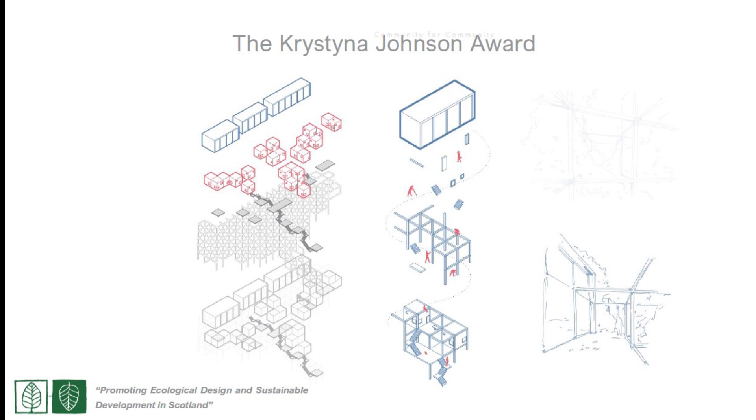Now going to move on to the Krystyna Johnson Award, and we should have Jim joining us via Zoom.

The Krystyna Johnson Award was set up in 2003 when my wife, Krystyna, died far too young, but we decided in SEDA that we would try and remember her with some kind of student scholarship, which originally was a travel award, but changed over the years.

Krystyna was an architect who worked mainly in refurbishment and restoration. She worked for Assist on the Glasgow tenement in the early days of the Glasgow tenement that we heard about yesterday from the MSP. She then became the first in-house architect for a housing association and continued to do a lot of refurbishment and rehabilitation work. This was basically putting bathrooms into Victorian tenements where residents had been sharing a toilet on the stairs.

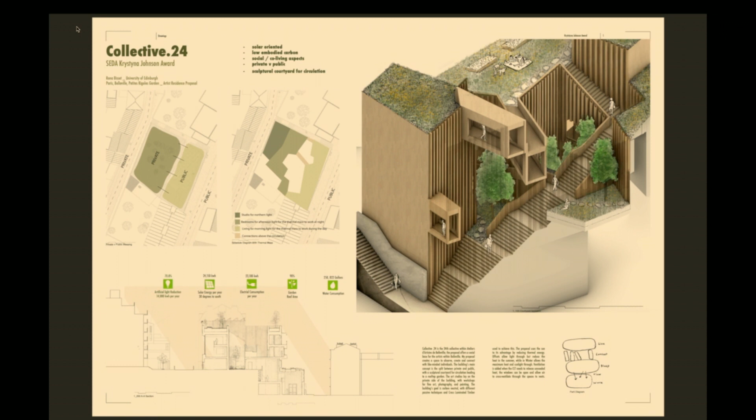The staircase separates the public from the private domains so that the artist residents can observe, create and connect with the artist community in the neighbourhood. Currently in Belleville, the artist community is declining as expensive developments pop up, leaving artists unhomed and creating art squats which create an unhealthy, uncomfortable environment. The community is struggling to survive, so this is being created so they have a better quality of life, and through the co-living apartments can socialise together and connect while having that artistry.

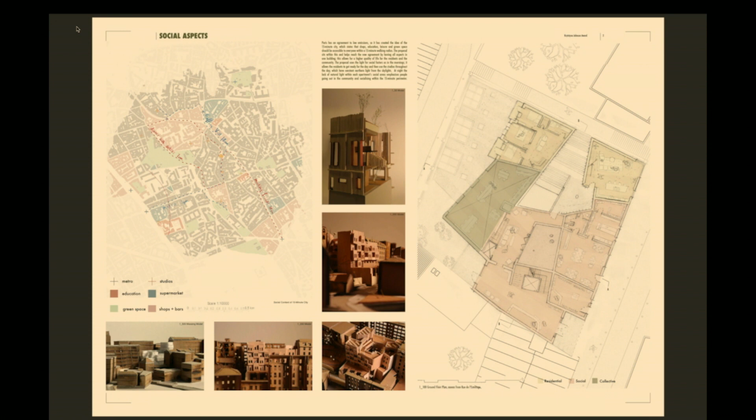My proposal is situated in a 15-minute city, so it encourages the residents to explore the community at night, especially because the natural light in the building is reduced through the building. So it encourages the residents to explore, creating social interactions and a better lifestyle for residents and neighbours, altogether reducing the CO2 emissions of Paris.

So how I did this was I used an in-depth light analysis that indicated the thermal mass of my main building material, CLT. This helps reduce the energy cost and the carbon cost by 70.8% compared to a normal concrete building. Alongside this, the natural light helped me indicate where my room schedule would be, so when divided up by private and public it helped me create my living to my bedroom spaces. When the thermal mass absorbs too much heat, I added offsets for the double height windows in the living area so that in summer it creates shade but also has cross ventilation from windows to the vents, and the vents enter through the staircase.

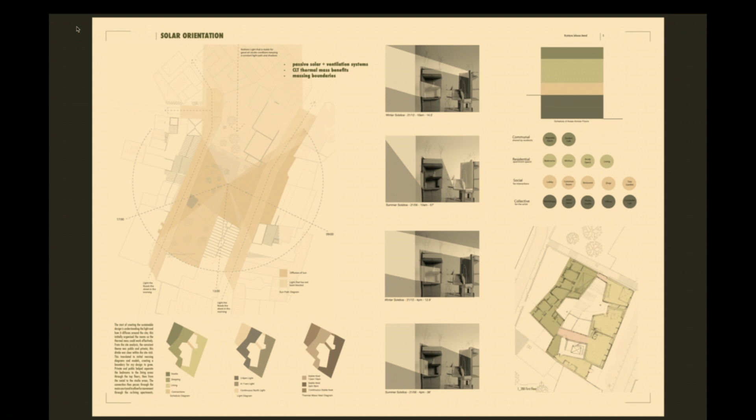I carried out a rough analysis to figure out the numbers for embodied carbon. My transportation factors emit 400 kilograms of CO2, and through the use of alnus cordata trees, this offsets the carbon by 240 kilograms of CO2 per tree, which I've used around my staircase and on the garden.

These trees are grown in a process called agroforestry. Agroforestry creates a microclimate for the farming and produces more yield and protects the crops.

The main material is cross-laminated timber, which emits 75% less carbon than concrete and also holds hygroscopic properties. It can be easily repaired and reused into biomass or new buildings, like the London V&A Courtyard Pavilion in 2018. However, if this building was situated in Scotland, it would not be feasible because there's a CLT plant in France which I have used, and in Scotland we do not have one yet.

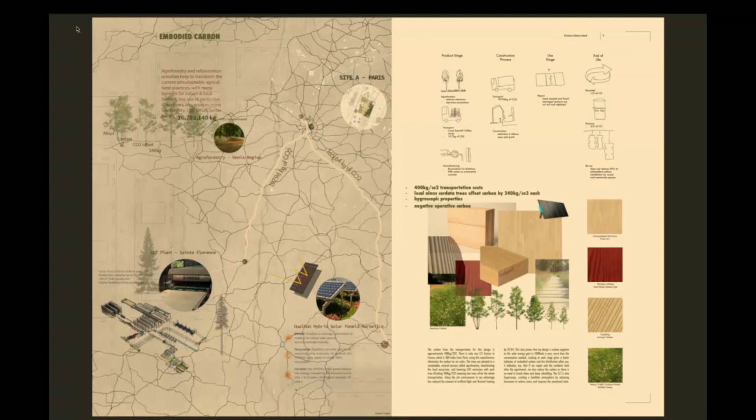So the carbon neutral design, with the air miles, costs 6,803.44 kilograms of CO2.

Each tree is located at my roof garden, and this is a 1.9 metre thick roof. There's a delayed drainage system so that the urban setting is not flooded in climate change, and it contains 7 layers of water permeability, which prevents water damage and controls moisture.

My intensive roof U-values are 0.07, with the max limit in Paris being 0.19. It also has hybrid 95% recyclable solar panels, which create 1,000 kilowatts a day, approximately the average monthly energy use of a house.

All in all, my design works well in context and enables a healthy community, creating an artist community too, helping with the responsibility to reduce the 30% of greenhouse gas emissions from the building sector.

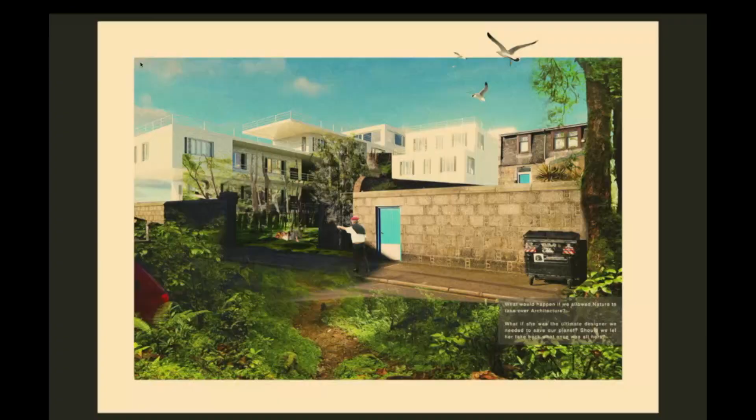The first thing I want to say is when I was a kid, I used to ride in the back seat of my father's or grandfather's car back in Venezuela, where I was born. I used to see all these construction sites, and I really hated them. I really thought architects were mean people, until I started studying architecture and realized it's a bit more than that.

So what would happen if we allowed nature to take back what we've taken from her? That's how I started with my project.

It's in the city center of Aberdeen, and it's a derelict space. As you can see, it's in a very busy area with a lot of shops and activity. It's also one of the worst streets in Aberdeen—very insecure, with quite a lot of homeless people on the streets.

So I started to tackle how I could change a little bit the environment for these people. You'll see in further slides how I can do this. I started with new materials that could be less expensive, lightweight, and have, for example, a scientific interest, which is very important today.

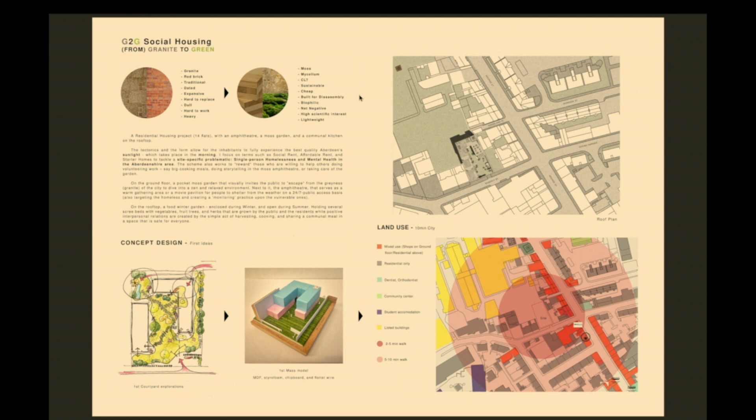The first thing I tackled is the morning light, which is very important in Aberdeen, since in Scotland we don't have much sunlight throughout the year. So I thought the morning light was quite a special thing to focus on, along with single-person homelessness and mental health in the Aberdeenshire area, which is a big issue I can see happening in this area.

First, I started with some data-driven design. I used Grasshopper and Ladybug to determine how my building would work.

I considered the volume of clouds throughout the year, which is 10 months out of 12 being cloudy days. From my background studying art, I was very inspired by the concept of komorebi—a Japanese concept of how light goes through the leaves, creating a mystic kind of environment that keeps you awake.

I also think architecture should focus more on site-specific problematics, which is something we're kind of missing. Certain cities have certain problems that should be addressed, and not all designs can be the same. In this case, I've tried to tackle single homelessness and hidden homelessness, which is obviously a political problem, but I'm looking at how we can address it through architecture.

I want you to do a quick exercise: imagine yourself in a room with 4 walls, a ceiling, and a floor. Imagine this room is gray—the ceiling is gray, the floor is gray. We are in Aberdeen, and it's raining and cold.

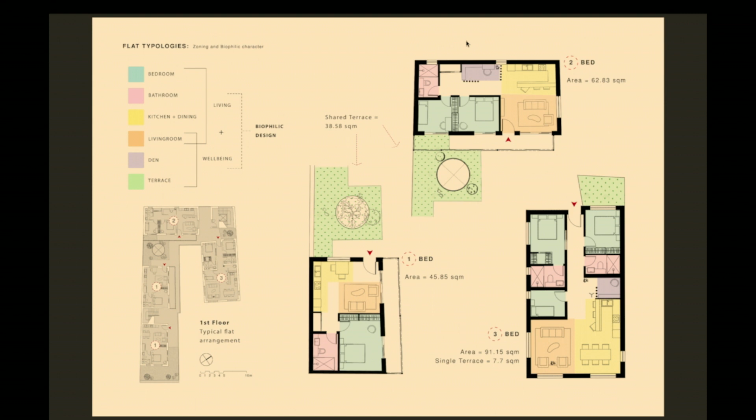So for my design, this is just a quick overview. I tried to design 3 types of flats—1 bed, 2 bed, and 3 bed—and thought strategically about how I can add certain spaces, like terrace areas and dens inside the flats, so people don't just live in the rooms all the time but get outside.

For the visual strategy, I've tried to use moss and this Japanese Zen garden strategy to drive people into the garden from outside to inside and vice versa. Do you think Scottish cities look like this at all? This would also help tackle urban heat island effects.

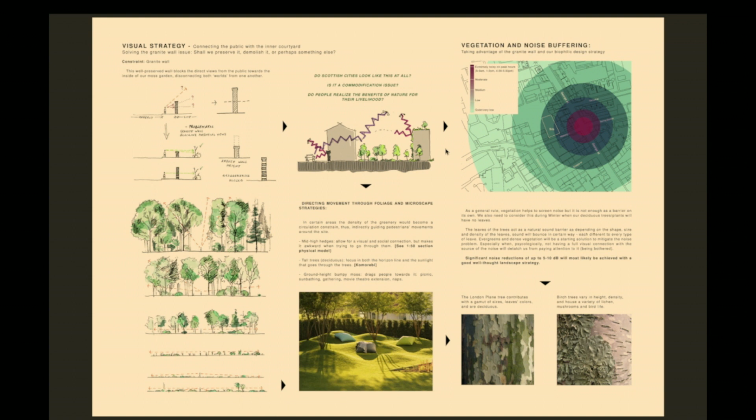I want to touch quickly on the wastewater heat recovery systems for my building. I don't use any bathtubs at all, which is for the sake of trying to save CO2—a massive, important thing in this project. It's over 2 tons of CO2 saved per year, only with the heat recovery systems.

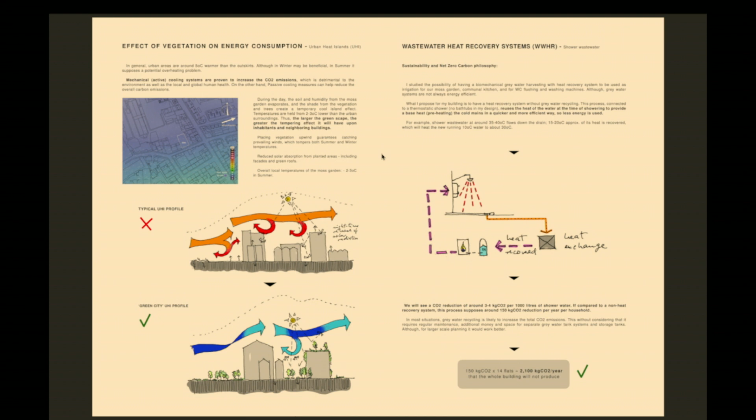As I mentioned before, urban heat islands are also diminishing or increasing the temperature depending on the season. In summer it will be less hot compared to other cities, for example Madrid or Barcelona. This would help a lot.

So this is my final slide, my poster slide—the one I presented for this competition. As you can see, it has 2 parts. The top one is a mycelium interior design I've created for indoor public spaces. It's a modular design made with Grasshopper, and it has many things.

It has the mycelium, the soil, and the springtails, which I have back there with my models. They are alive, and they keep this whole microsystem alive, so you don't need any maintenance—one of the other problems I was trying to tackle, since green roofs and green walls are very expensive to maintain.

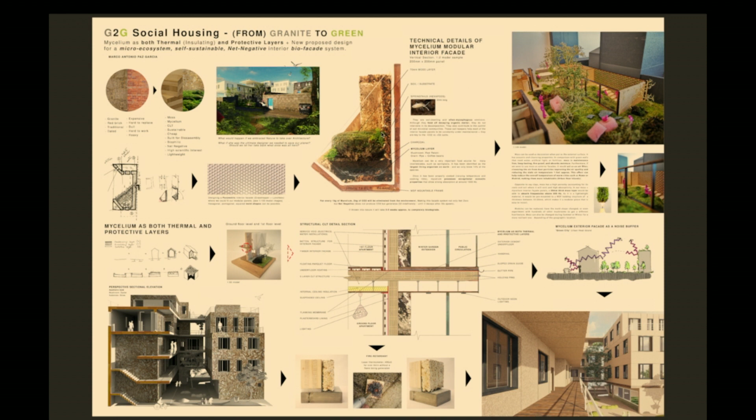And the bottom one, which is the mycelium, has both thermal and protective layers, built for a disassembly kind of approach. I'll be at the back if you'd like to ask more questions. That's my time, that's up.

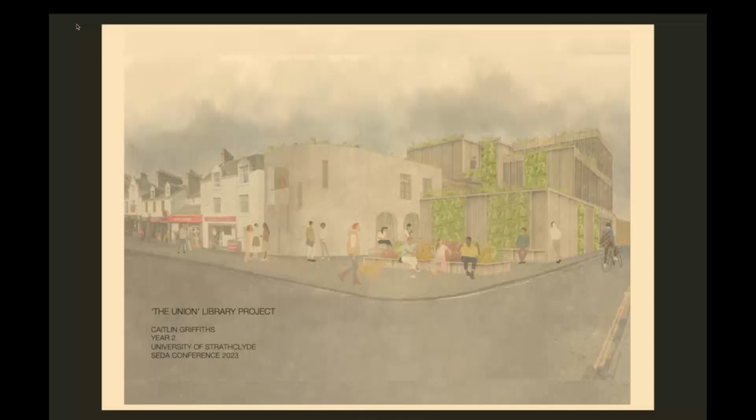It's all yours. So I'm Caitlin, from the University of Strathclyde, and the project I'm presenting today is my Year 2 project, the design of a student study library in the town of St Andrews. I'll quickly go over the design process and how the building responds to the site, as I think that's one of the most important things about the building.

St Andrews is known for its traditional sandstone buildings and old cobblestone streets, but there are many green spaces only really known by the people who live there, due to many being hidden away, closed, or even forgotten about. My project aims at looking at ways to appreciate these spaces more, highlighting the importance of views and vistas around St Andrews, and incorporating these into a library environment where I think they should be more important.

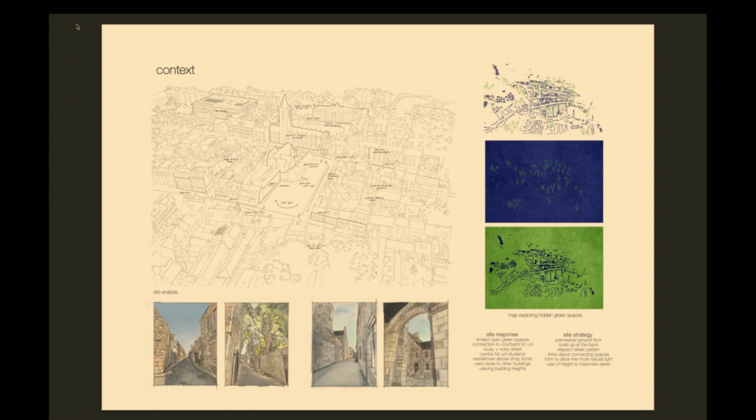The aim of the library was to respectfully create a modern study environment in quite a busy corner of the town, by connecting green spaces and encouraging the sharing of knowledge in this new community space. The concept was a direct response to the brief, but most importantly to the context, with priorities placed on the environment, circular economy, and user comfort.

The creation of outdoor seating, green terraces and courtyards made Union Street more of a destination and not just a route, creating interest for not only library users but passers-by as well, as it is such a populated area.

There was also an importance to make sure the building sat cohesively within its context. By stacking the spaces, which you can maybe see better in the next slide, the library doesn't sit too harshly on that site edge. The use of a modern construction material and curtain wall also creates quite a permeable facade and doesn't become too overbearing on the site.

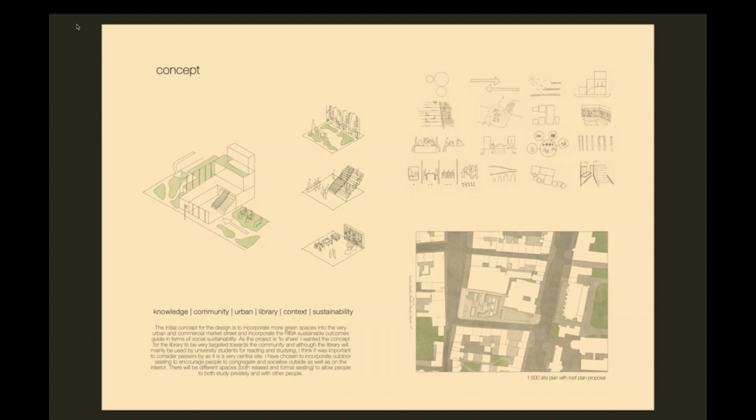So like I said, the Union Library was designed to encourage the sharing of knowledge, which I think is reflected a lot in the organisation of the plan.

The building is arranged in a very open plan style, with the public and private spaces being quite carefully thought out and deliberately placed. The idea was to have a large foyer space to accommodate people coming in from both main entrances, and a grand feature staircase that acted as an additional, more informal place for people to study, read, and chat, connecting the library users to the space a bit more.

I won't go over all the spaces, but the reading room and bookshelves have been placed on the first floor, just at the top of the stairs, to keep the books out of direct sunlight. Library users are guided here by the position of the stairs and the skylights above, and the layout of the bookcases helps lead your eye up and round onto the first floor.

There is a central void that connects all the spaces, as well as views out to the courtyard and over the town. Everything around the library is designed around that, as well as the natural light that enters the building. There's also space for a visiting academic placed at the front onto the street, replicating the way residences on Market Street are placed above the shop fronts.

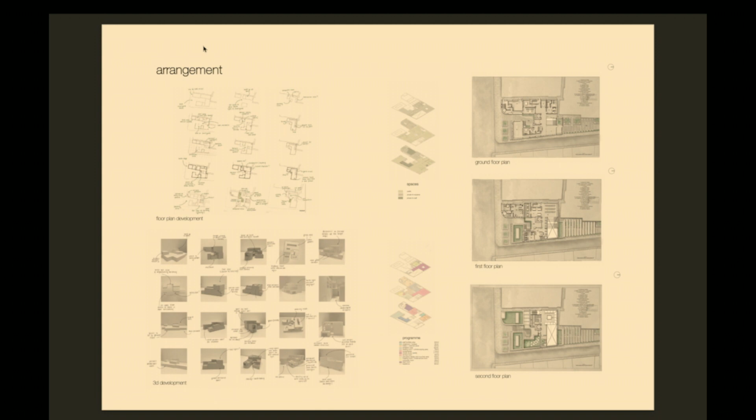So as you walk into the library, I wanted to create a really welcoming and calming environment, which I think is achieved not only by the use of natural light, but the use of quite a simple material palette, which is very different to the other buildings in St Andrews.

The library not only has spaces and places for personal study, but overall it creates a space for people to come together as a group and appreciate the wildflower planters in the courtyard spaces.

The goal was to allow as many spaces as possible to have direct access to a green terrace or to the courtyard, creating quite a seamless connection between indoors and outdoors, which I think is quite important in such an urban location, and to allow library users to recharge and take a step back from their studies.

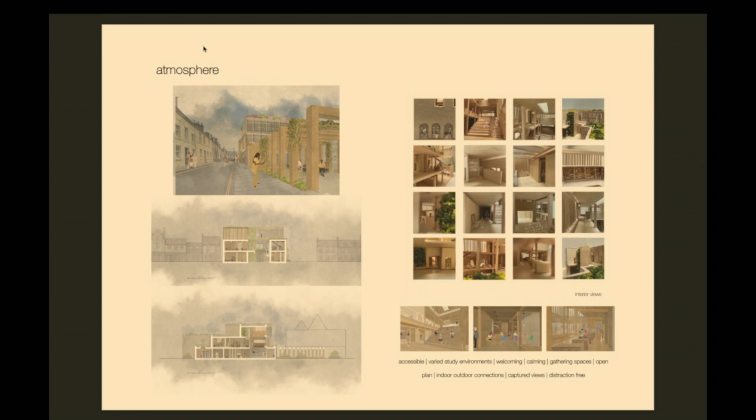So along with the creation of a new community space within the town, the materiality was obviously quite an important factor in the sustainability of the project, but both of these things went hand in hand with the atmosphere I wanted to create anyway, so it worked out quite well.

So I've got a CLT and glulam structure, which I thought about in terms of the circular economy, which worked quite well with that as well. It also tied into the atmosphere and created quite a peaceful entrance, which continued onto the inside. There's also the green roof that's increasing biodiversity but also reducing noise pollution.

There's a section of the building in sandstone that acts as a transition between the old buildings on Market Street and into this oasis corner of timber. The idea was that the use of timber only really reveals itself as you get closer to the building, which hints at the initial idea of those hidden green spaces, even though now those once hidden green spaces have been brought to the forefront of a modern urban library design.

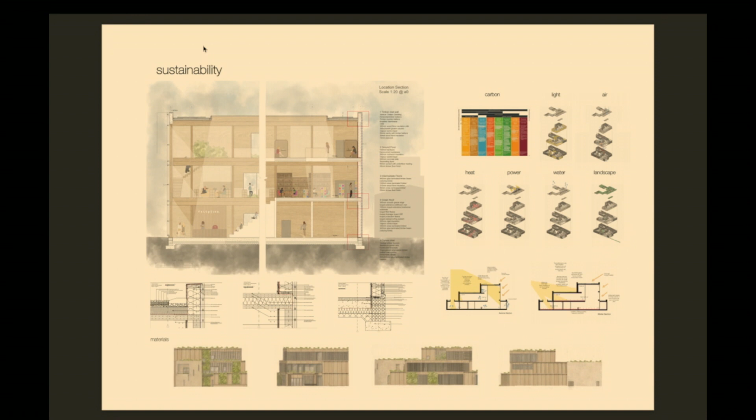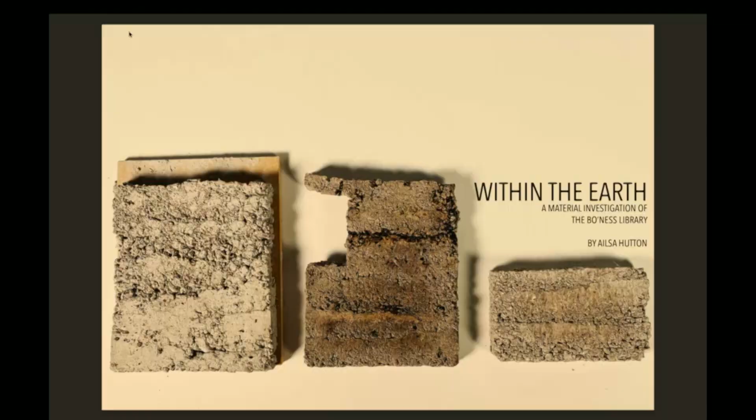Hello everyone, my name is Ailsa Hutton and I study at the Mackintosh School of Architecture. This is my project, Within the Earth, which is an adaptation design on the Bo'ness Library, focusing on a material investigation. So to begin with, I started with four principles.

First being earth, where I considered soil and its natural resources on the land. Then water, looking at water's interaction with our landscape and further understanding its properties. People, to understand how people interacted with Bo'ness's infrastructure. And finally, quality, how to improve the quality of life by improving the quality of a building.

So Bo'ness is not the most economic site, I would say. It's fallen short to quite a lot of economic decline in the past.

There are lots of disused buildings, which is where I started to think about reusing these brownfield sites for their building materials, such as timber, stone, etc.

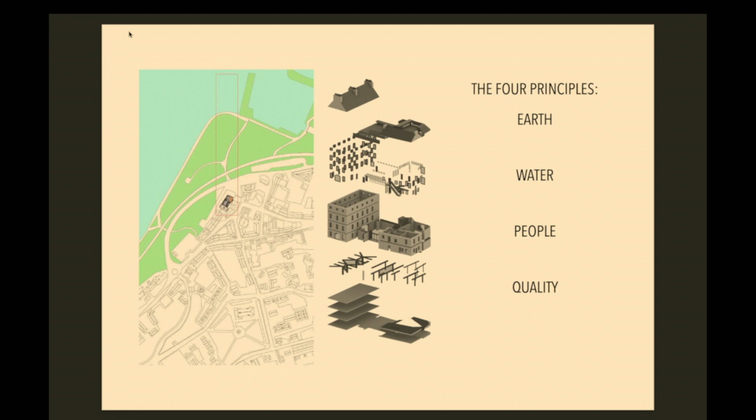However, when I looked closely, I actually saw how nature then reclaimed these sites, which made me consider how to use nature and architecture as complementary elements instead of contrasting ones.

So firstly, I wanted to investigate the geology of the land in Bo'ness, where I discovered that Bo'ness actually has a lot of marine clay deposits near the surface. And this interested me because it meant that there was more potential to use these building materials.

I then went on to research plants found locally in the area and found that eelgrass seaweed is found in the Firth of Forth, which is important for later.

To begin my material research, after learning that there was a lot of clay at the top of the surface, that really excited me, as it meant that rammed earth was an option.

Each sample of this rammed earth has a different ratio of soil to plaster, because I wanted to see how well it could hold together using as little binding agents as possible. And I also found that you can make cuts out of it for windows and doors.

The eelgrass that I found in the river is one of the most common species used for seaweed insulation. So I collected some that had washed up on the shore, more just to understand how to use the material.

Firstly, I made a model of the seaweed insulation panels to get an idea of scale and size. And then I went on to mix crushed seaweed with agar flakes, which created a bioplastic, and this was more just to understand how much potential this material has that we've not yet thought about.

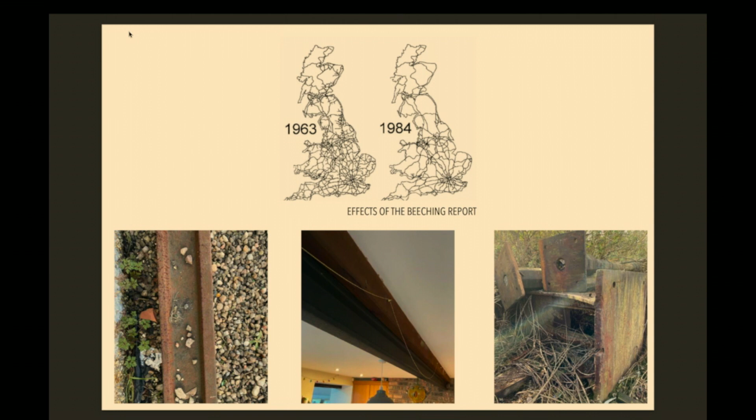So after the natural resources, I then went on to look at the industrial decline of Bo'ness, which seemed to be linked with the well-known Beeching report in the 60s. This disconnected lots of small towns within the UK.

Due to this, I actually did find a lot of scrap railway materials throughout Bo'ness, and railway tracks look a lot like I-beams, which are used to hold up buildings. So then I thought about recycling these scrap materials using urban mining for the structure in the building.

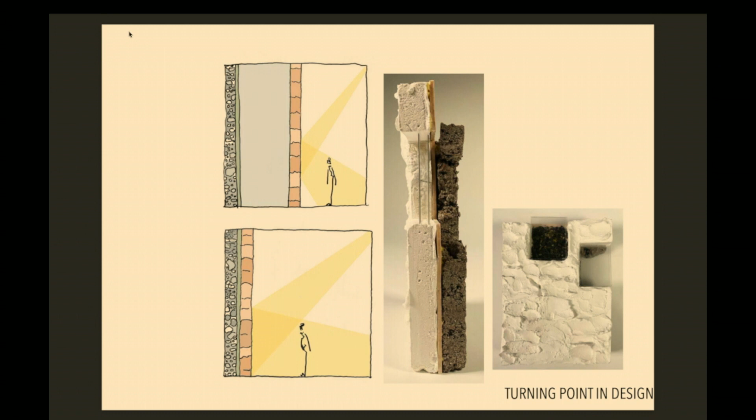So a turning point in my design was understanding how to use the focal point of the rammed earth more realistically. So initially it was going to be like an aesthetic feature within the building that helped with ventilation and air quality. However, this made the spaces less adaptable, and it also decreased the amount of natural light you could get there. So to resolve those issues, I really started to consider using rammed earth within the wall envelope.

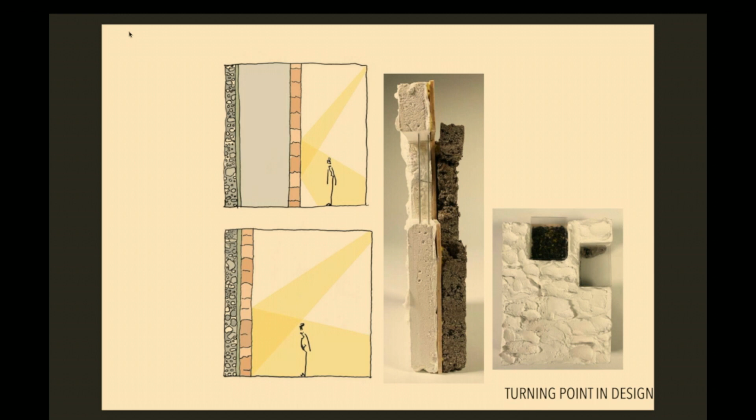This is quite a difficult concept to try and understand, especially with the Scottish climate. Rammed earth and water are not a great mixture.

So my design overall is a loose fit community space. It maintains the library function with a cafe area and a library area combined. It has a lecture hall space in the basement, an event space on the first floor, and a quiet work area on the ground floor.

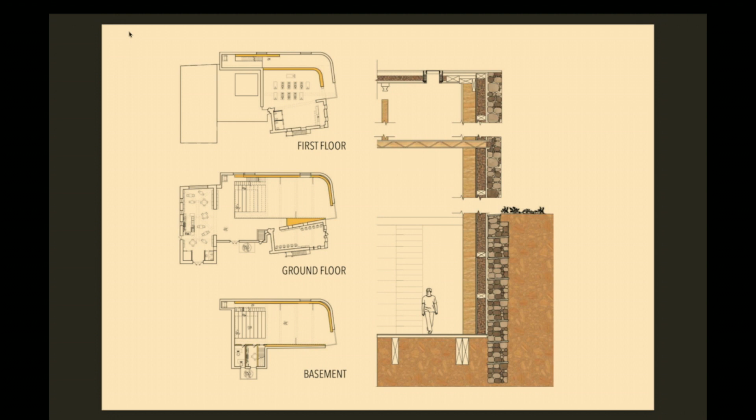My goal for the overall design was to create a space which gives local people opportunities currently not available to them due to Bo'ness's infrastructure.

I achieve this by creating a loose-fit space that can be adapted easily. One example of this is the curtain system that I have in the lecture hall basement area, as well as the double height ceilings on the first floor so that more activities can be done there, such as sports and whatnot.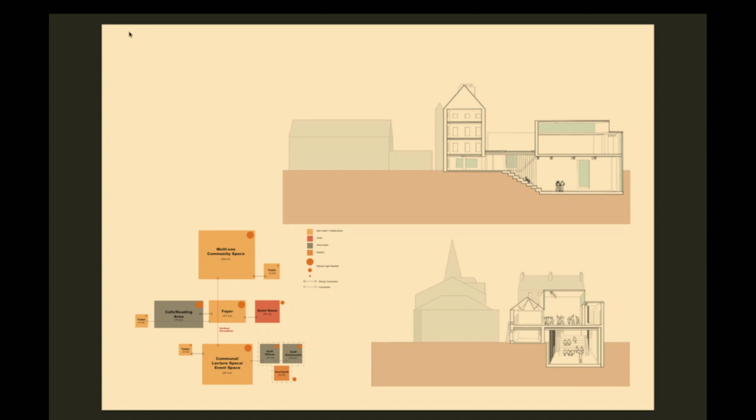To come back to the curtains, these were inspired by the MAAK Architecture Foundation, where they replaced drywall with a curtain system in a community centre to increase space adaptivity.

I was inspired by this project, so to source the curtain, I was thinking about involving the wider community by asking local schools to teach students how to make patchwork squares for this quilted curtain, hopefully meaning that the community would have a better connection with the library and increase community engagement.

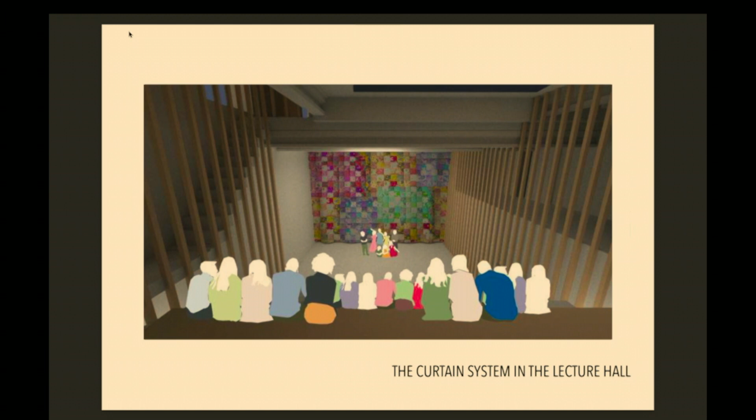So coming back to these four principles, I discovered that earth, water and people were all connected to give the quality of the building. So the materials provided structural quality and air quality.

The biomaterials also increased the ethical quality of the design in terms of sustainability and carbon emissions. The quality of life for the people in Bowness would also improve as the design provides social development, education about biomaterials, and most importantly, it provides space for people to enjoy.

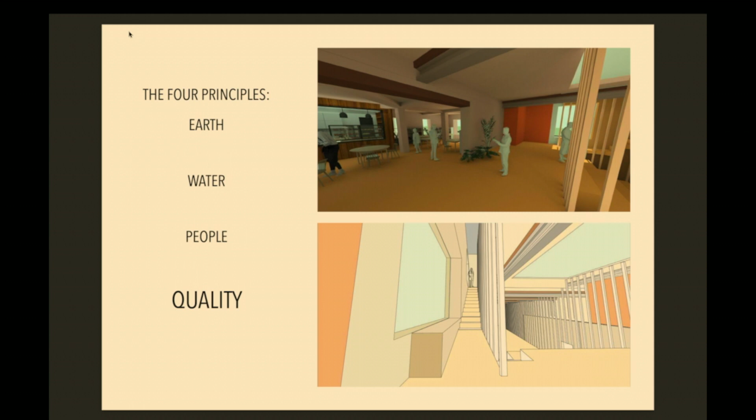And just in conclusion, using materials as a focal point for this project really helped me design with care. The style was really formed by the limitations I set for myself at the beginning.

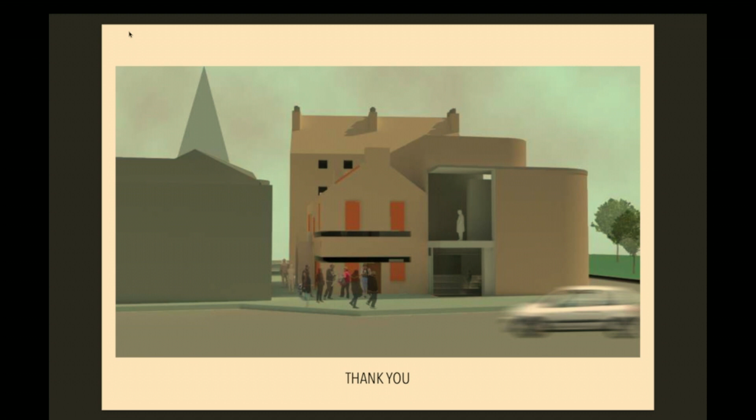It's almost like when you need to cook dinner, but you've only got the ingredients you've got in the cupboard. The design is really aimed to work holistically, taking care of people, using it just as they've taken care of its environmental impact. It shows massive potential for what nature has to take care of us, just as long as we take care of it. Overall, I really think it is a design of life itself. Thank you very much for listening.

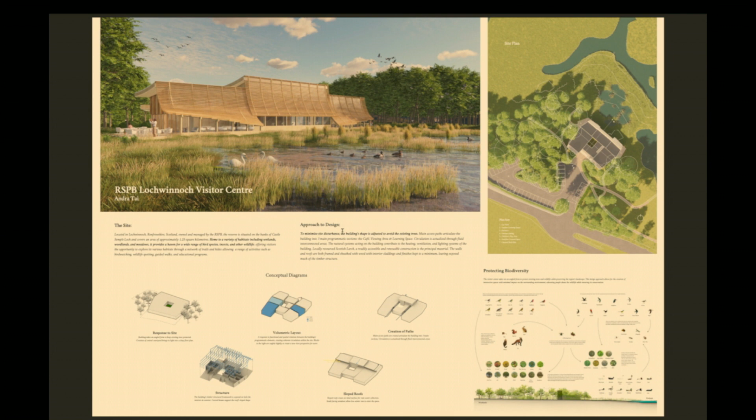The diagram above, which is the exploded axonometric, visually represents the main components of the building and the materials used. Curved recycled aluminum roof plates will be used for the roof, helping direct precipitation into the rain gutter, allowing for rainwater collection and storage.

These roof plates will be made from recycled aluminum, recycled from post-consumer scrap aluminum taken from facades and windows that have been dismounted from buildings.

Secondly would be the beams and timber columns, made from locally sourced Scottish larch. This will reduce transporting costs and thus reduce the embodied carbon of the building.

Thirdly would be the south-facing skylights, since the direction of the sun comes from the south. This allows natural light to enter the space, as it's a very deep floor plan.

Fourth would be the louvered facade at the back. This allows protection against solar radiation, but still allows light to diffuse into the space. The high ceiling of the room prevents overheating during summer and also improves ventilation.

Moving on to the floor plan, upon entering the reception you're greeted by a direct view into the marshland, which invites and engages the user into the space.

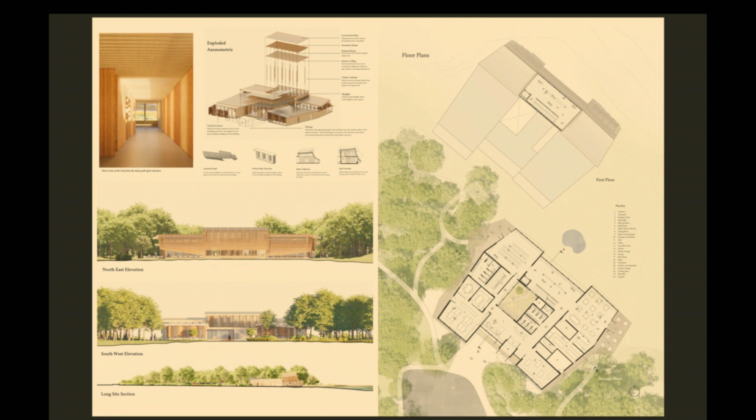The cut-away axonometric gives a clearer view of the building's internal spaces.

Green areas around the building contribute to purification and cooling of air, and also protect the facade from solar radiation. During the winter, the building is warmed by winter sun and heated by simple passive gain when sun angles are low.

It is also shaded from the summer sun during the summer. Because it's shaded from the heat and glare during summer, it regulates the building temperature and significantly reduces energy consumption costs for cooling.

The window openings also allow for ventilation through the stack effect. They facilitate passive cooling during summer with low maintenance costs and with little to no energy expense.

A huge part of this concept was to recycle and reuse bricks from the demolished existing building, to be used as vibro-compacted brick. These vibro-compacted bricks negate the use of concrete pile foundations and thus reduce the environmental impact that this building has.

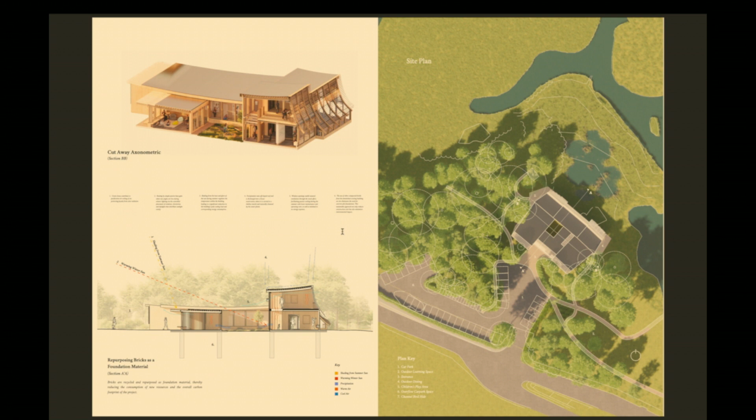I wanted to implement a terrace wetland landscape as well for the purification of wastewater. Surface water is collected from surrounding areas and discharged into a linear watercourse and harvested for domestic reuse.

Wastewater is then brought into the sewer and purified through biopurification terraces with the use of marsh plants. Purified water can then be utilized for irrigating and subsequently returned to its natural watercourses.

Whilst having our discussion with the RSPB, they mentioned that we had to refrain from using solar panels because of the glare that it might cause for the migrating birds. So the only viable option was to have heating from geothermal sources.

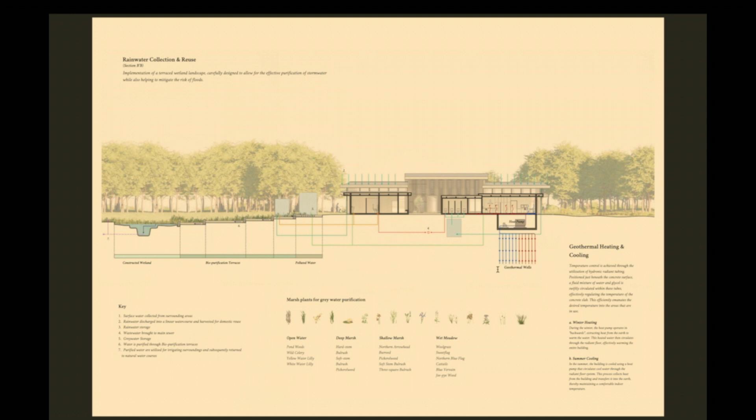Paying a lot of attention to the nature and sensitivity of the timber, because throughout the year the Nature Centre will receive different qualities of light, which allows the play of shadow and light. Yeah, thank you.

Thank you. We've been looking at these very good submissions, very, very impressive. All 5 of them are very, very impressive. I've had the chance to look at the schemes in detail over the last 2 weeks.